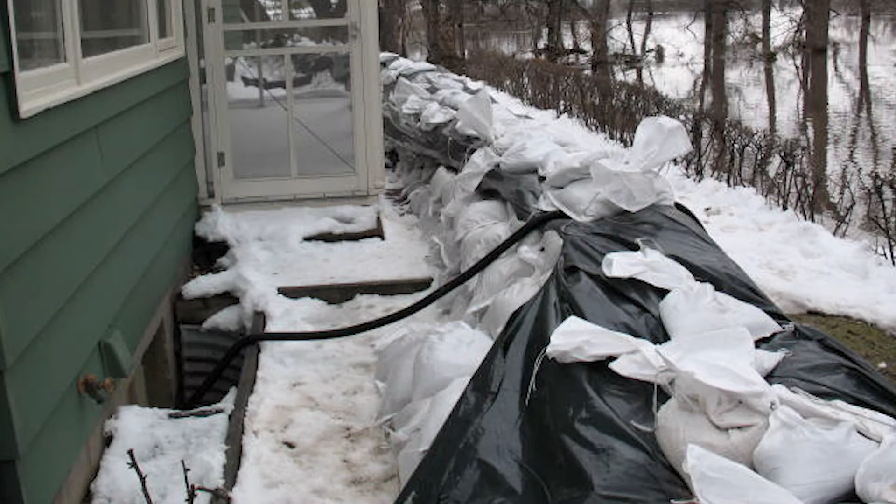So my life has really been impacted by flooding. I've had numerous family members that have lost their homes, and I've seen the devastation that happened in '97 and 2009. And we've all come to the realization that we need to have this project and we need to keep it moving forward.

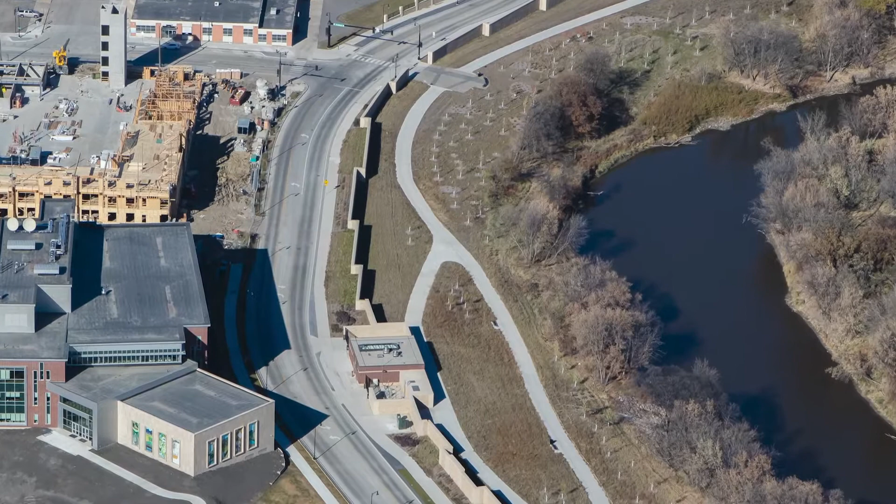I'm happy to show during this tour today all of the great work that's been done to date. And right now I'm walking along part of the levee here in Fargo and this beautiful flood wall that was implemented. Before this project was put into place, we used to have a 20-foot earth and clay levee here protecting all of downtown Fargo over here to my left.

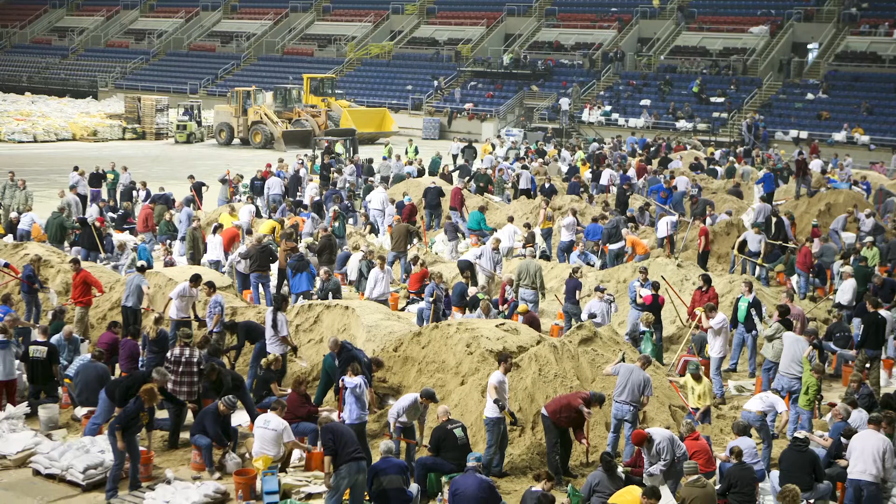And after 2009, it was just evident that we cannot continue to rely on these temporary measures. I was personally involved in a number of levee monitoring during 2009. Part of the stretch that I was looking after actually had a breach. Fortunately, we were able to fix it and shore it up. But it was a massive amount of work, and that story can be told numerous times across the city of Fargo during 2009.

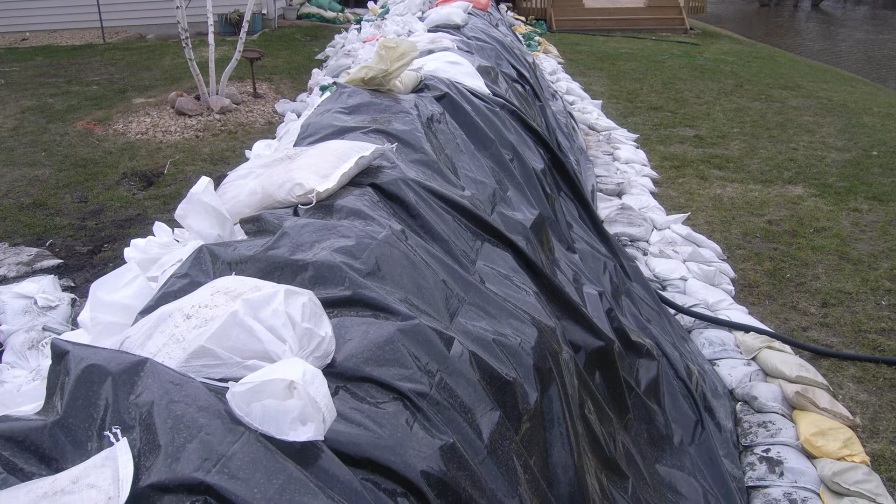As you all know, we were successful in our ability to fight that flood. But as scientists, we also know that the ability to have a much higher flood than what we experienced in 2009 is a very real possibility. And so we continue to move forward with this project and effort to provide substantial flood protection for the city of Fargo, the city of West Fargo, Moorhead, Horace, Harwood, and rural Cass County residents.

So I was a member of the diversion board in 2016 through 2018, and upon assuming the responsibilities of the executive director, I've really come to rely on a lot of the expert engineers and scientists that have been working on this project. And today our first guest that we're going to talk to is Nathan Boerboom. And here he comes right now.

Hi Nathan, how are you? Joe. Not too bad, how about yourself?

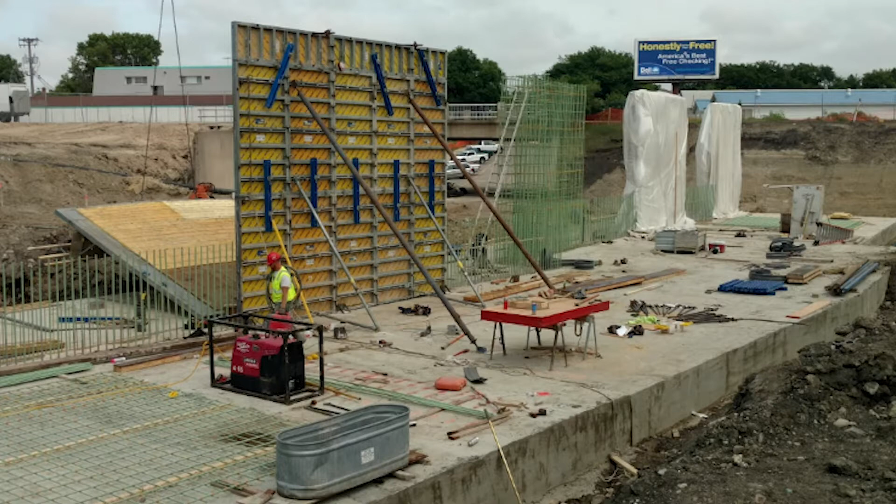Good. So Nathan is an engineer at the city of Fargo. I'll have him talk a little bit about himself, but he's been involved in this project since the beginning. Yeah, I'm Nathan Boerboom with the City of Fargo, Division Engineer. I've been heavily involved in all the in-town flood projects that have been going on for over 10 years now. Since 2009, we've built over 22 miles of levees and floodwalls.

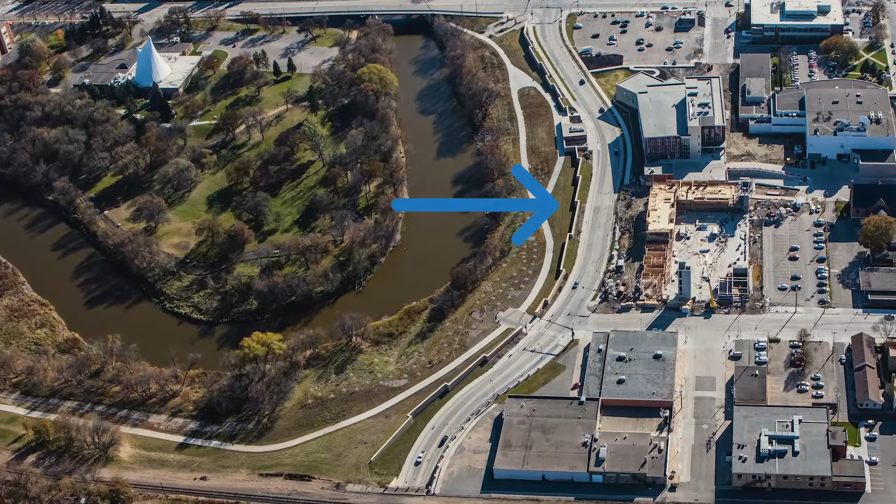We're standing here in front of the 2nd Street North floodwall. This was built in 2016 and 17. This one was built by the Diversion Authority. It is all the way from NP Avenue up to about 5th Avenue, the 5th Avenue underpass. This floodwall has actually seen water in 2019, so we did get to test out components of it in 2019. This floodwall is a critical component of all the in-town works that have been completed since 2009.

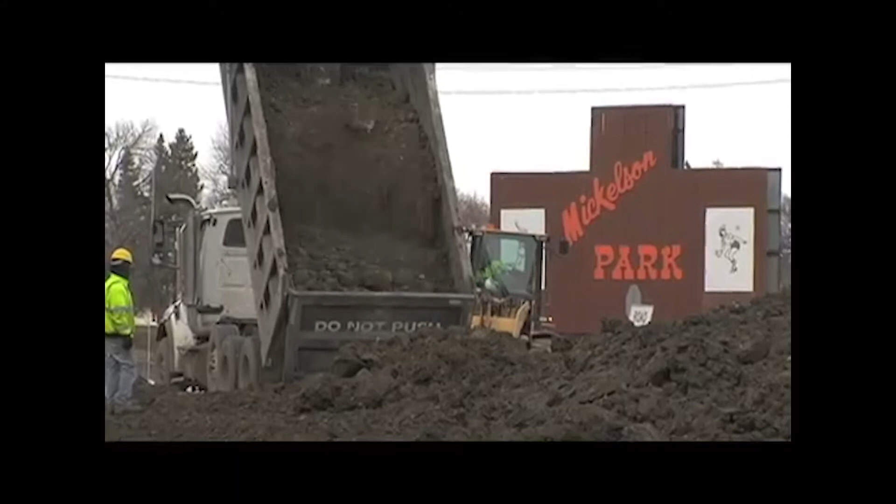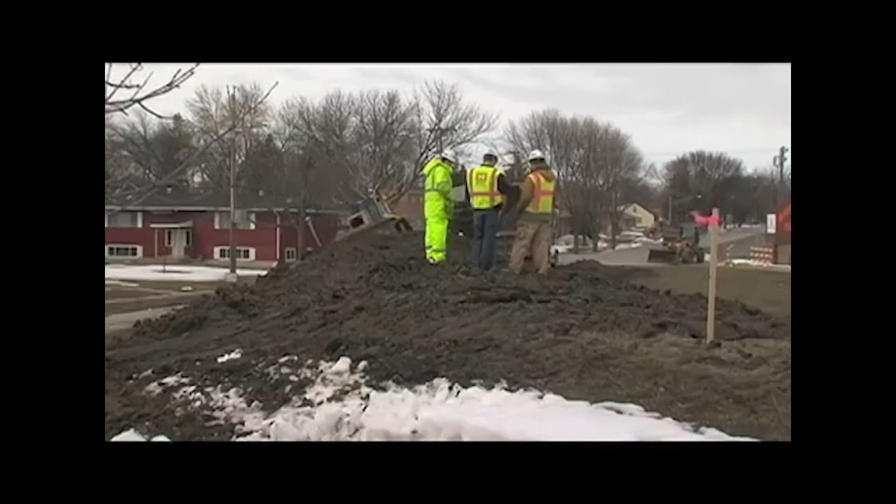2009, '97, all the historical floods except for 2019, we actually had to build a temporary levee out on 2nd Street here. That was quite an effort every spring to have to do. We couldn't start building that levee until the river actually got to about a stage of 24 feet, and we had water on the street at 30 feet. So it was very critical to time that construction just appropriately, and it took probably about 2,500 trucks to bring that clay where this floodwall now sits.

So it was a large effort, and when you think of all the emergency levees that we had to construct, this was our most difficult to construct and held back most of the water. Luckily, it was successful, and now we have this permanent floodwall we can rely on in the future.

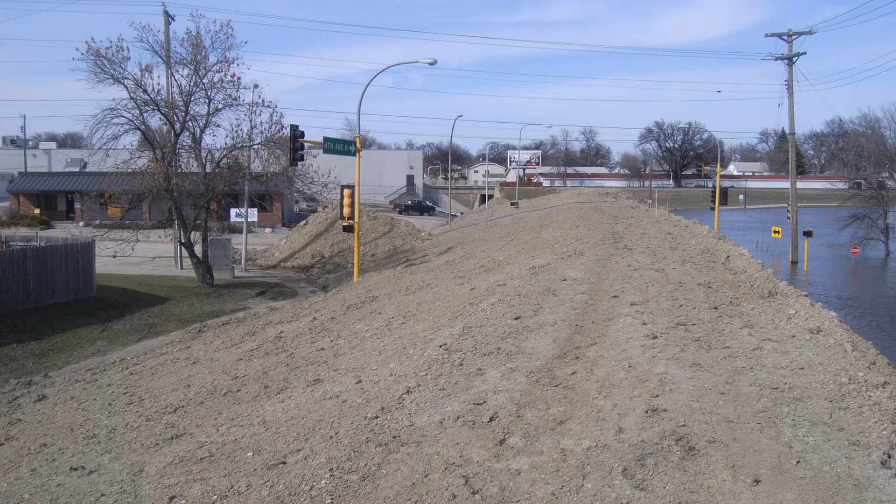Well, this looks great, Nathan. So there's obviously been a lot of work done already. Can you explain to the legislators how much work is left to be done? Sure. So like I said, we've built over 22 miles of levees right now. We still have about, I think it's 4 or 5 miles still to construct here in town.

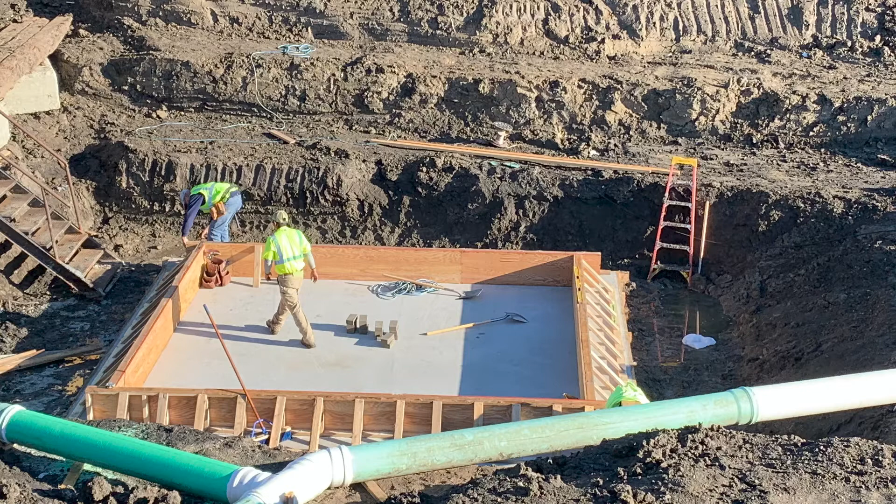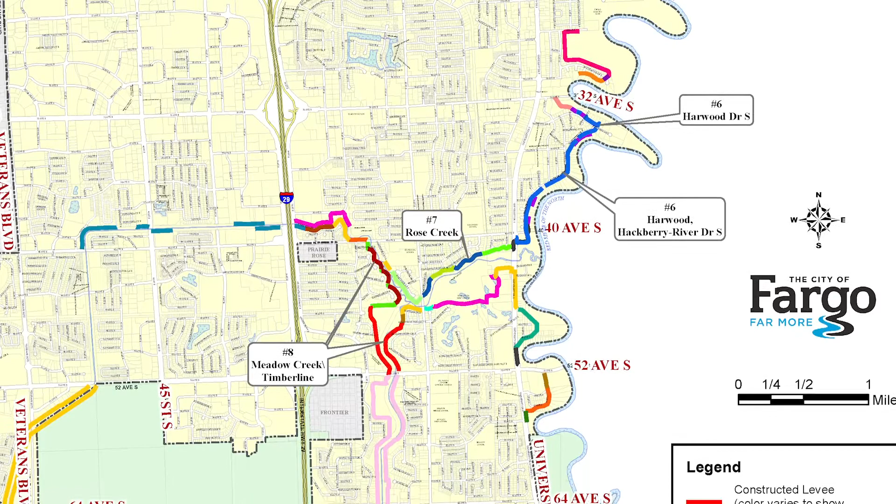With the change of Plan B going from 35 feet to 37 feet, that required additional in-town levees to be constructed beyond what was originally planned under the original diversion project. So right now, those are the projects we're concentrating on. There's 5 neighborhoods that we're specifically working on right now. We hope to construct 3 of those next summer, and then the following 2 in 2022. So we're getting close to wrapping up the in-town works, and hopefully we will be able to do so soon.

So it's interesting. So these projects here are actually part of the diversion project. Is that right? I mean, they all kind of work in concert with each other. And so we need to complete this work as well as the channel and the southern embankment and all of those other associated structures. Is that correct?

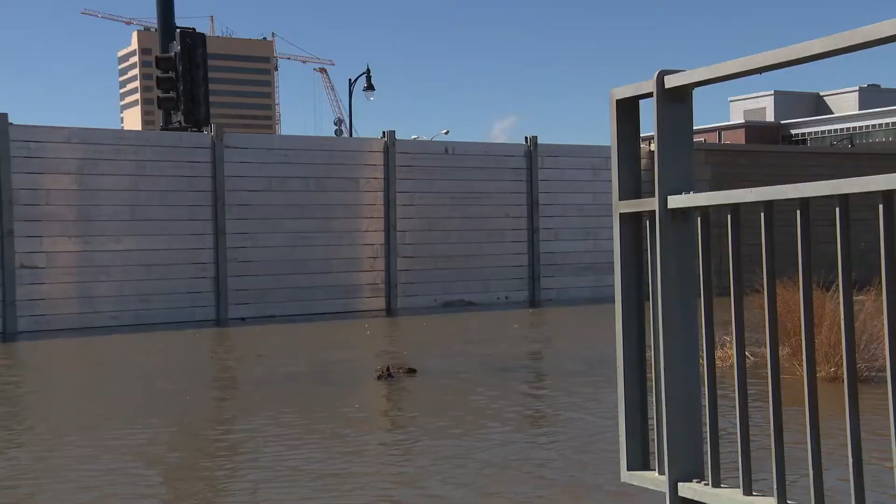Yeah, absolutely. The diversion project will not operate at a flood below 37 feet. So at 37 feet, you're still going to have quite a bit of water up against this flood wall here that we're standing next to right now, as well as a lot of other levees through town. And then even as the diversion continues to operate, we're going to continue to have to rely on all these levees and flood walls to safely pass those floodwaters through town. So without these levees, it would not be a complete project.

And I just mentioned previously that statistically we know that there's a chance of a much greater flood event than what we experienced in 2009, which is the flood of record. What is this infrastructure built to? I mean, can we handle a 500-year flood or greater?

So without the diversion, no. We would still have to build emergency levees even on an event less than the 100-year flood without the diversion. So if we had a flood similar to 2009, Fargo would still have to be building about 20 miles worth of emergency levees. So even though we've completed over 22 miles, we still would have a large emergency effort on our hands if we experience that 2009 flood again.

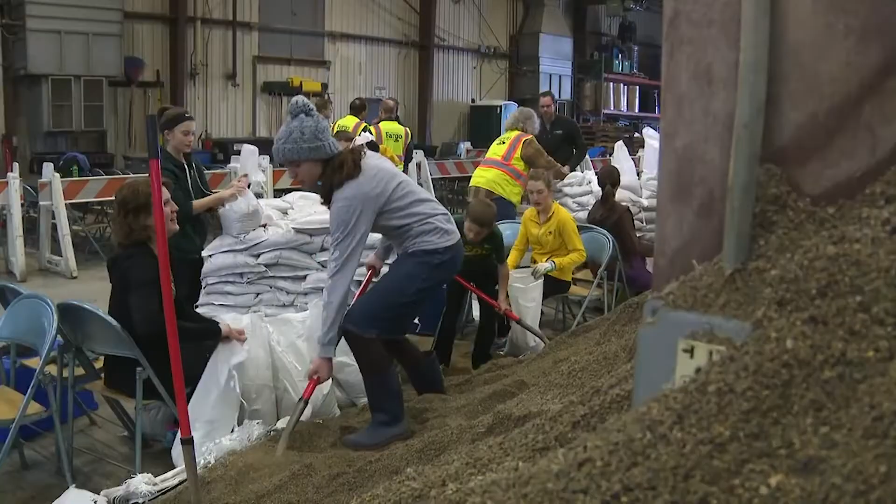However, once the diversion is completed, on the 100-year event with the additional in-town works I just mentioned, we will not have to complete any emergency measures. On the 500-year event, though, we still would have to. But at that level, we feel it's a much more manageable event that the city is willing to take on, once the diversion is completed.

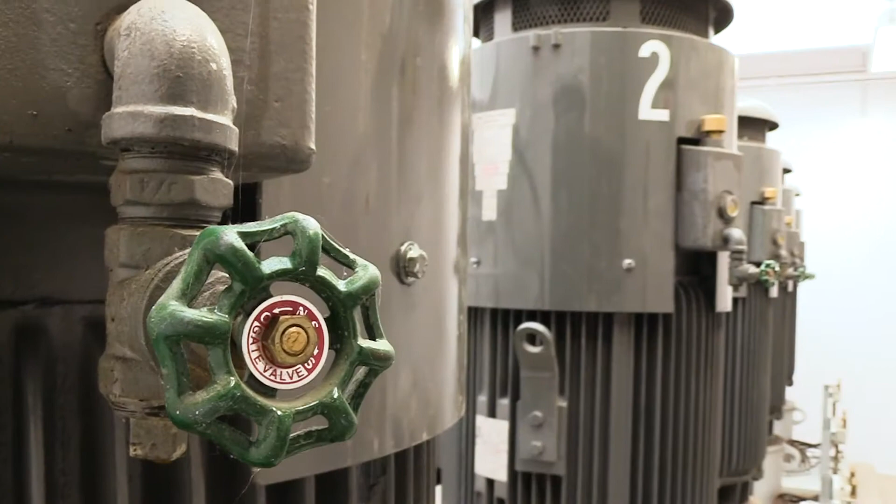Sure. So we're standing in front of a pump station. Is that right? Correct. Yep. So this is a pump station that serves basically all of downtown Fargo here. It has 5 pumps in it that are 15,000 gallons per minute each. So it's a rather large pump station. It will handle a lot of water and move it.

And these pump stations are necessary any time the river is high. We can no longer gravity flow any storm, rainfall or snow melt into the river. We have to physically pump all that water into the river. So that's a critical component of the flood infrastructure, not just the levees and flood walls, but also all the pump stations we have throughout town. And right now, the city of Fargo has 75 of these throughout the city.

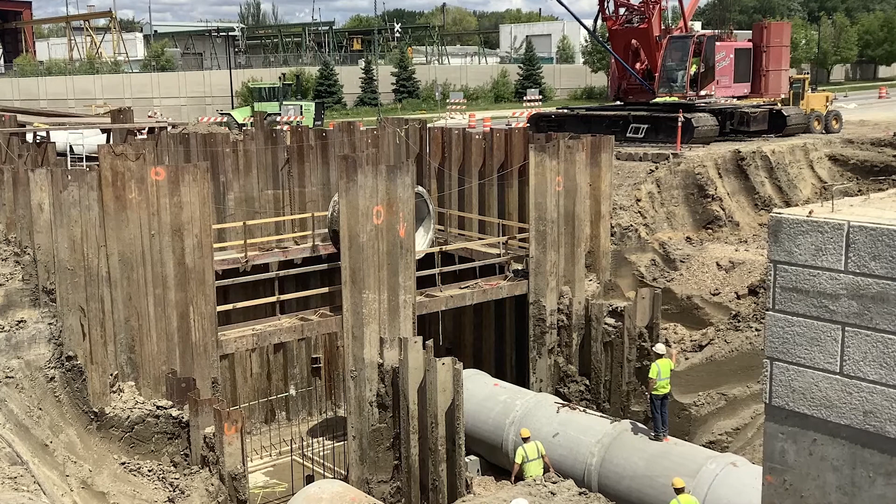So 75 pump stations, are a lot of those related to Red River flooding, and are those going to be part of the diversion project as well? Yes, all these 75 pump stations are critical as well, just like the levees and flood walls, to safely pass those floodwaters through town. The majority of them are located on the Red River, but we also have legal drains coming through the city. So Drain 27 or Drain 53 are a couple of them on the south side of the city. Those have lift stations or pump stations along those as well to pump all that runoff into the drains.

Yeah, that's interesting. And so I understand that we have a lot of flood risk from those drains as well, right? So if there were no diversion, we're talking about many miles of potential levees to try to give us some level of flood protection along those drains. Correct. As well. Yep, absolutely.

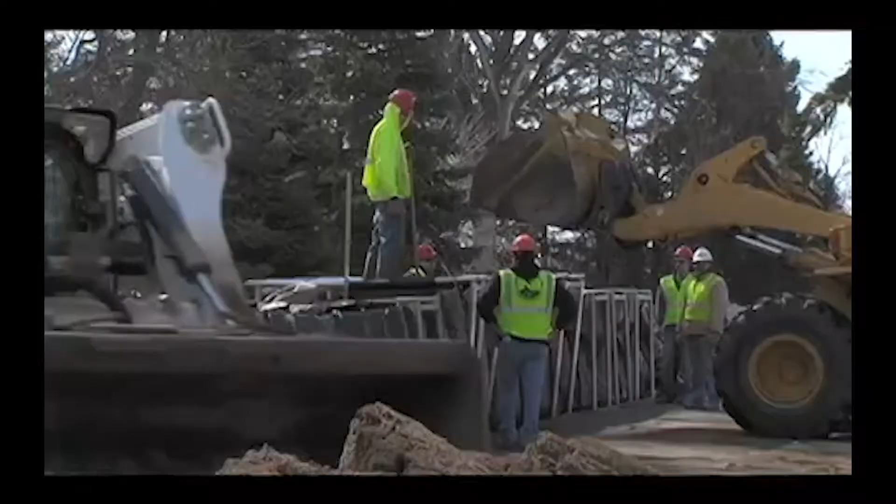So not only do we have to worry about the Red River, only one side, luckily, Fargo has to worry about. Moorhead has to deal with it on their own. But we also have to worry about 2 sides of these legal drains. And you're exactly right. There's miles of those legal drains coming through unprotected through the city that we have to either build temporary levees or try to build a permanent levee along there, which we have done in some areas but not completed. Yeah, and that's what I think a lot of people don't understand.

We're always focused on the Red River flooding, but we have the Sheyenne River, the Maple River, all of the tributaries that come in from the west also cause problems in rural Cass County. The city of West Fargo, to a certain extent, they do have their Sheyenne diversion, which the FM diversion is going to dovetail into. But it's a pretty major concern and definitely a benefit for the diversion project to be able to provide that comprehensive protection for everybody in the Red River Valley in this area.

Yeah, absolutely. This project is a metro-wide approach to solve Fargo, Moorhead, West Fargo, Harwood, Horace, everybody's flooding issues from all those rivers you mentioned.

There you go. So here is the actual electrical room. So this is where all the electrical components are that handle all the pumps and motors on the other side. You can also see here's the level in the wet well today. So right now it's about 7 feet of water sitting in there. Again, it's 30 feet down.

So if it was raining out today, you'd see that water level coming up, and when it reached a certain level, it would call for one of the pumps to turn on, and it just cycles through all these 5 pumps on its own. So that way we make sure that we get an equal amount of hours on all the pumps, and then if for some reason the water's coming in so fast that one pump won't keep up, it'll call for additional pumps to turn on until all 5 pumps are running. Wow, that's pretty impressive.

And so all of these new lift stations with these PLCs are all tied into a control center somewhere, right? So you can monitor remotely what's happening with the pump stations? Yep, correct. So part of that is the SCADA system. It remotely reports to a server that the City of Fargo has, and I can pull it up on my phone, and we can look to see if there's any issues with the lift stations, any alarms that may be going off, or which ones are running as well.

So it's a helpful tool for our public works when we've got 75 lift stations, that they can remotely monitor and see if there's any issues they have to go check out. Yeah, that certainly provides some advantages over what happened in 2009 when we probably had to manually check on these pump stations and have some redundant backup pumps and generators and everything else around. So it's nice to take advantage of technology that exists today.

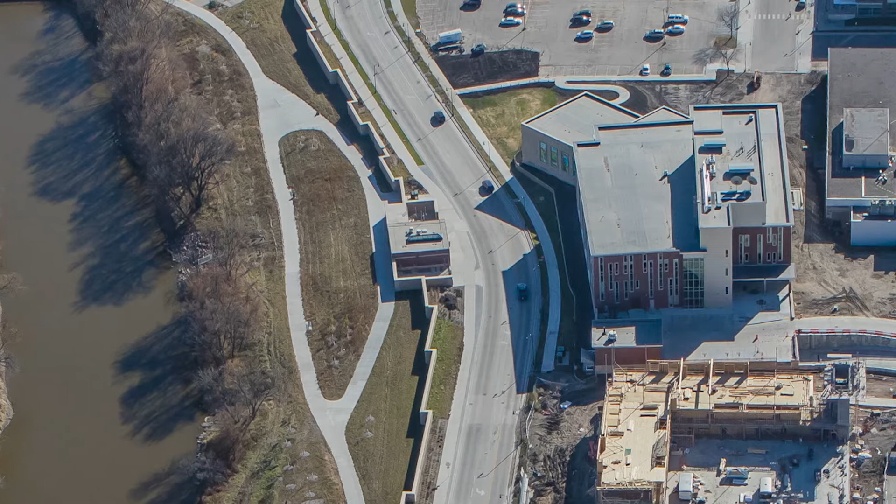For sure, that's excellent. All right, Nathan, why don't we move on to another spot? I'd love to explore more about where the City of Fargo's at with their... Absolutely, we can go check out one of those.

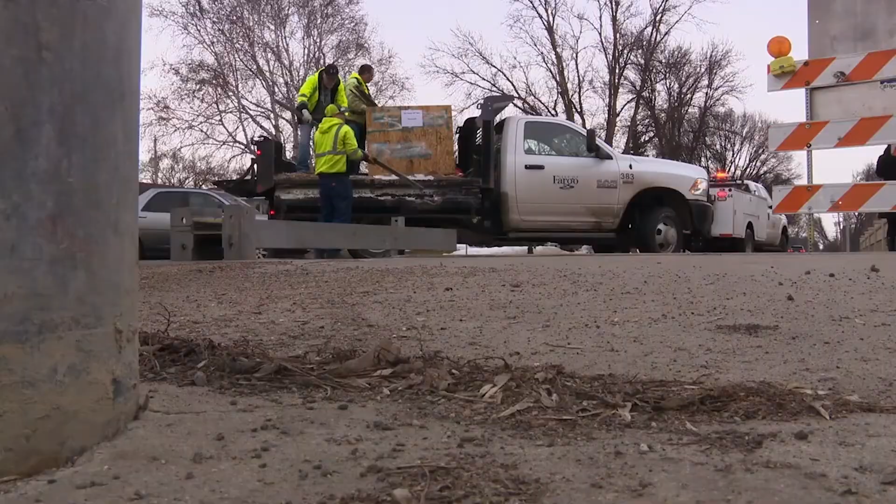So Nathan, this is the First Avenue North Bridge, and so this is the crossing. I notice a large opening here in our levee system. How do we manage to deal with this? Correct. So here there's removable aluminum planks that we install. About every 8 feet, there would be a column coming up along the First Avenue Bridge in this opening that our public works guys will come in and install when the water's rising, and they'll create that wall that we need to hold back those floodwaters.

So this one here is about 160 feet wide, so it's the longest one in town. If our public works guys bring about 10, 12 guys down here, they can get it installed in probably about 5-6 hours. So it doesn't take too long, but it's still something that we have to make sure we get in place at the perfect time.

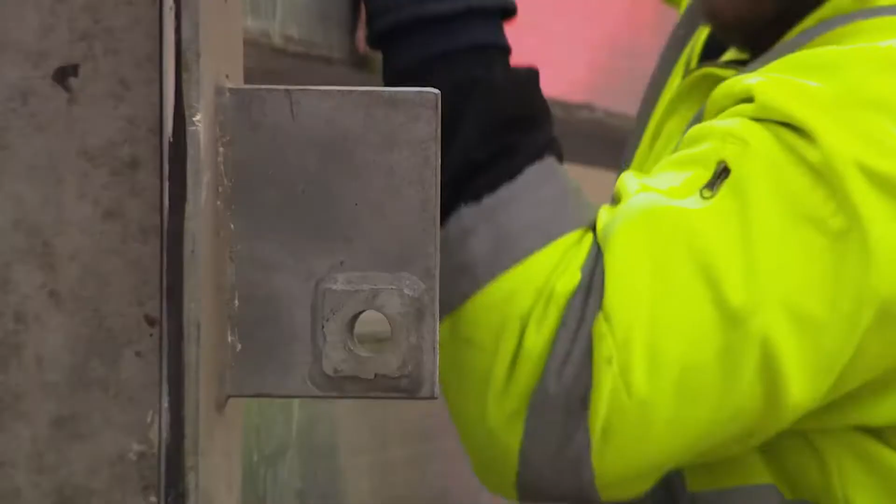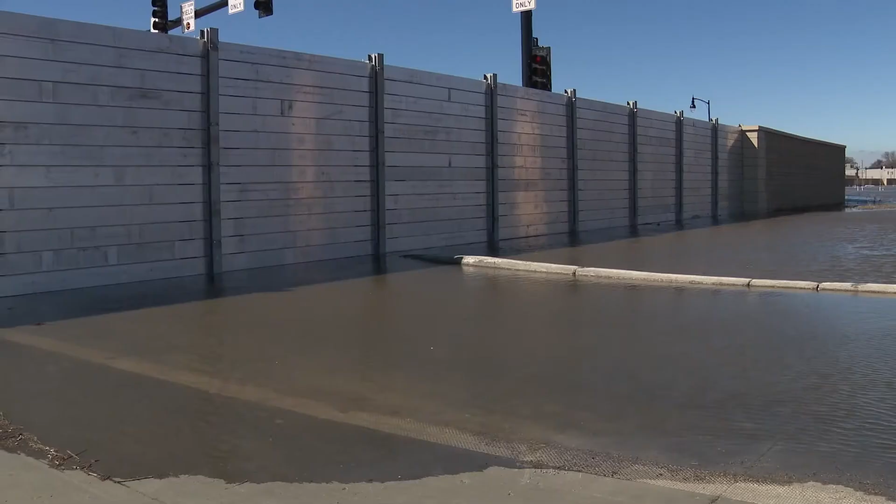Yeah. And I remember this bridge was closed in 2019? It had floodwater up against this temporary barrier here. Yep, correct. 2019 was the first time we got water up against this removable barrier, and it worked as expected. Yeah, I call it temporary. I guess it's removable because it is certifiable as far as 100-year protection. Correct. It's something that's utilized elsewhere in the state.

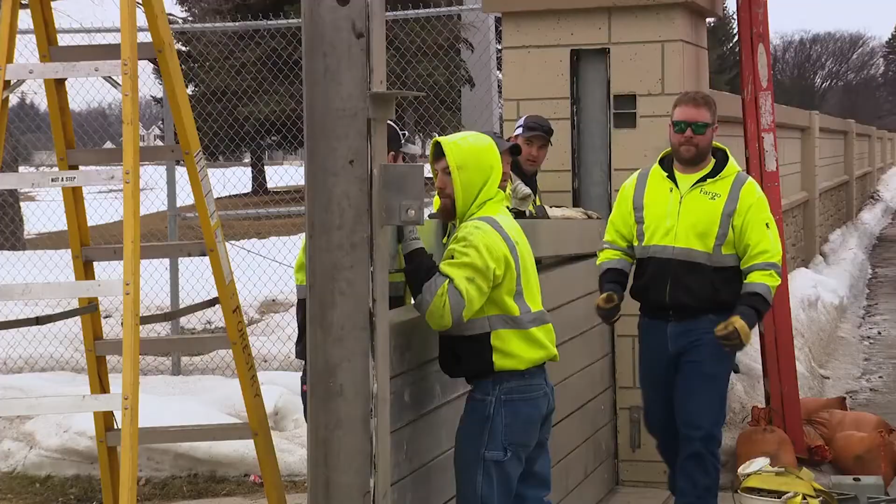Grand Forks has a handful of these as well, and Moorhead has them, and here in Fargo we have, I believe, 6 of these removable openings now throughout the city. So we try to limit them because obviously they're not as structural as a concrete wall is, but it's still something that we can rely on during a flood and allows us to maintain the transportation aspects that come through the city.

Yeah, I suppose it wouldn't have been feasible to reconstruct this bridge and raise the elevation so you go up and over. Correct. So this is a cost-effective, innovative solution here.

So when this is closed during, say, a 100-year flood event, do we still have a good transportation conduit between Moorhead and Fargo? So the Main Avenue bridge is elevated high enough where we do not have to do any temporary measures on it. So that allows us to keep that connectivity between Fargo and Moorhead. And then, of course, the interstate bridge is open as well. Sure. But that would be the only 2 bridges open during a 100-year flood versus the 6 that we have today.

Sure. And how many of these removable barriers do we have along the location? So we have, I believe, 6 here. We got a couple up by the El Zagal Golf Course, we got 2 here at 2nd Street North, and then we got 2 over at 2nd Street South as well. Excellent. All right, well, let's go down south and take a look at what we got going on down there. Sounds good.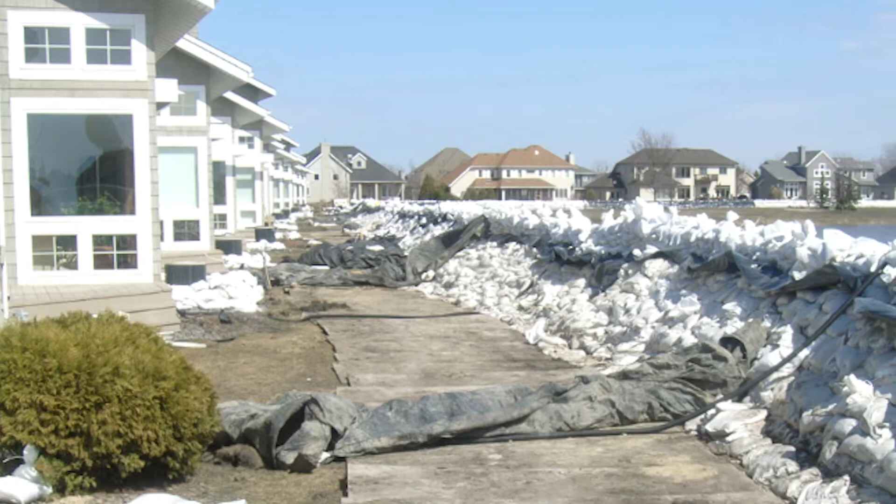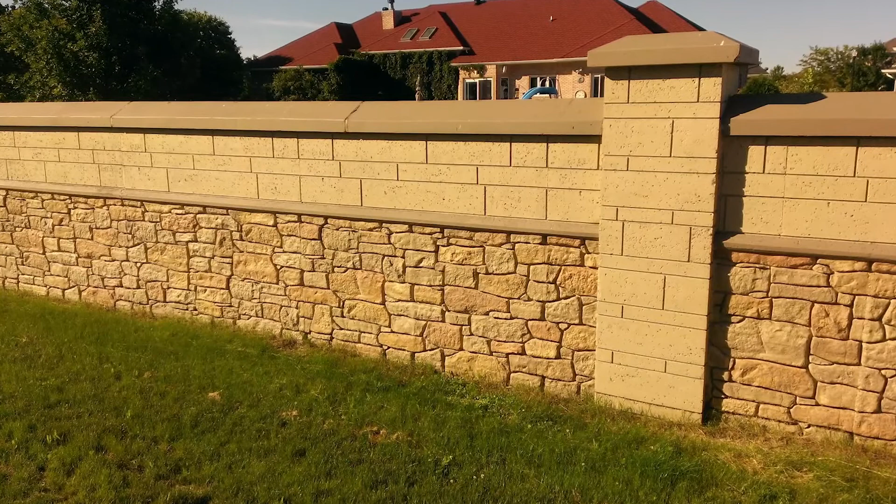I know this area was impacted in 97 and in 2009, and actually where we're standing right now, there was a home here not that long ago. Is that correct? Correct. Yep. So we're seeing a lot of levees and floodwalls, as we talked about, along both sides of the drain here. Obviously, these are also going to provide protection while the diversion project's in place as well. Right? Correct. So just like downtown, during a 37-foot flood, there will be water up against these levees and flood walls along here.

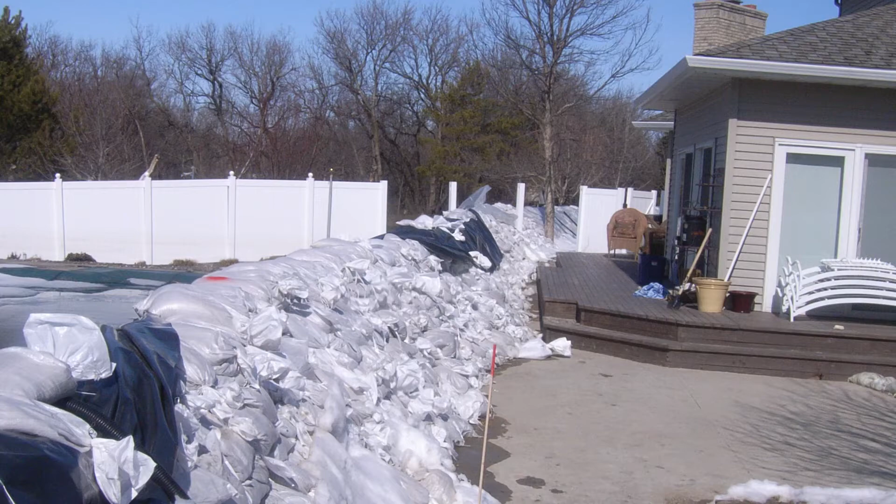So you're absolutely correct. Here we're standing where 3 homes used to exist. They were built probably in the late 80s, so they went through the 97 and 2009 floods. We had the sandbags behind them. After the 2009 flood, these 3 homes, as well as I think we're up to 255 homes right now that we've purchased and removed throughout the city, were removed and allowed us to build the levees.

So when we go through the project development, we try to maintain the houses as much as possible. Obviously we don't want to remove houses unnecessarily. They're our tax base as well. But unfortunately, there are quite a few homes, like I mentioned, over 250 of them, that we did have to acquire and remove in order to allow us to build levees or flood walls through here.

There are some areas throughout town where we have been able to build levees and flood walls behind existing homes and not have to acquire them. The stability of the riverbanks or the drain channel allowed it. There we had to acquire private easements or permanent levee easements behind these homes on their private property. I think right now we're up to 90 or almost 100 of those that we had to acquire. So not only have we impacted 250 plus homes to remove, but we have also impacted over 100 people's lives by building a levee or flood wall in their backyards.

So yeah, I think that's a good point, Nathan. When you look at this area right here, you can see some of these levees are pushed back quite a ways, obviously where the homes were removed, and that does increase some flood retention area, also bank stability, of course. But then you can see areas where we could save homes, and there's flood walls in order to keep those in place. Yep. And so it's kind of a balancing act. We're obviously impacting folks and trying to figure out ways that we can put the least impact on neighborhoods and people.

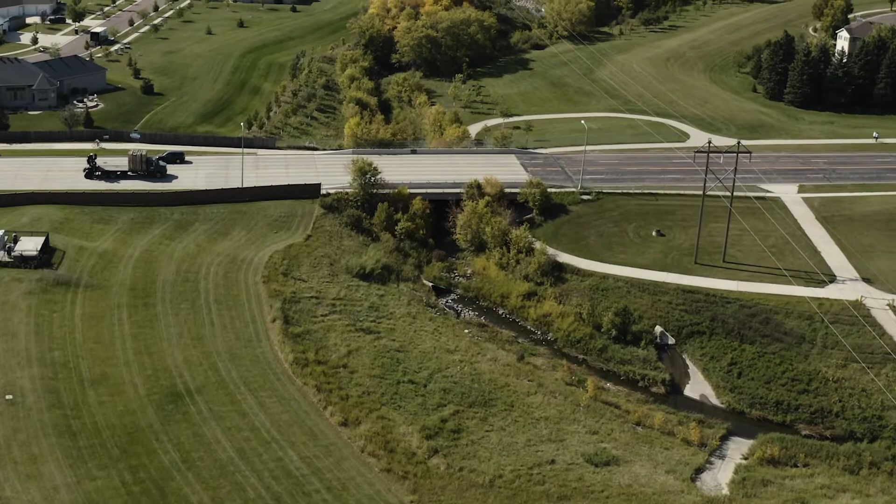And then on the northwest corner here is an area where we acquired 18 homes up there, removed all those, and built a levee through there. So those are really the 3 options that we use. And then a key component, though, of building levees anywhere throughout the city is also the Park District.

So the Fargo Park District is a separate entity from the city of Fargo. They're their own governing body, but they are a very willing partner for the city to be able to impact a lot of their properties. And here on the Rose Creek Golf Course, we shut this golf course down for a whole summer to allow us to be able to build a levee across the golf course. Which in return helped us not have to acquire so many homes, but also got that line of protection that we needed there.

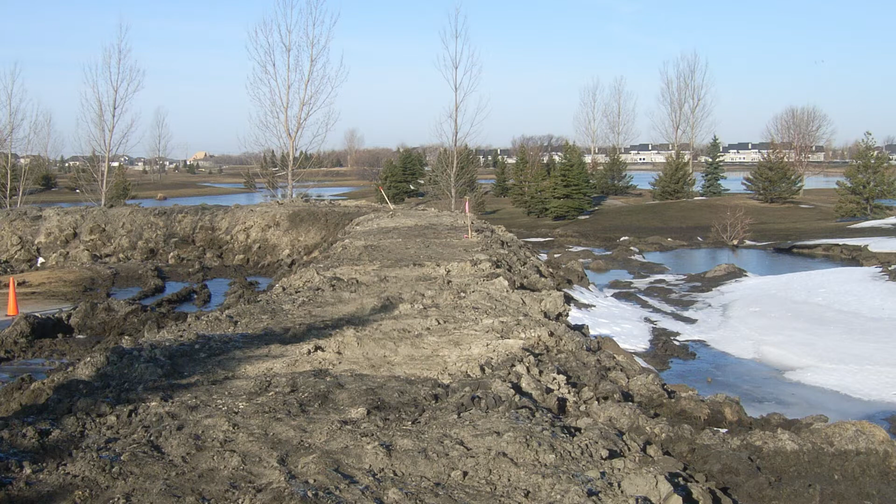And for example, in 2009, during the spring flood here, we were running out of time to be able to build a levee or sandbag levee behind all these homes. So there's a component here where we just physically put a couple excavators out in the golf course, start digging right on site, destroying their golf course, and throwing that dirt up on site and constructing a levee right there. So we didn't truck any dirt in, we destroyed their golf course for a whole summer there as well to be able to protect the city during the 2009 flood. And that's just one example.

There's countless areas throughout the park district, whether it's Mickelson Field, where we eliminated 3 softball fields, and they allowed us to build a levee on those. So without the park district, we wouldn't have been as successful as we have been to date with building levees. Yeah, that's a good point, Nathan. And I remember during the 2009 event, the night it actually crested, the forecast was for a 45-foot crest, which would have been much higher than what our temporary protection was built for.

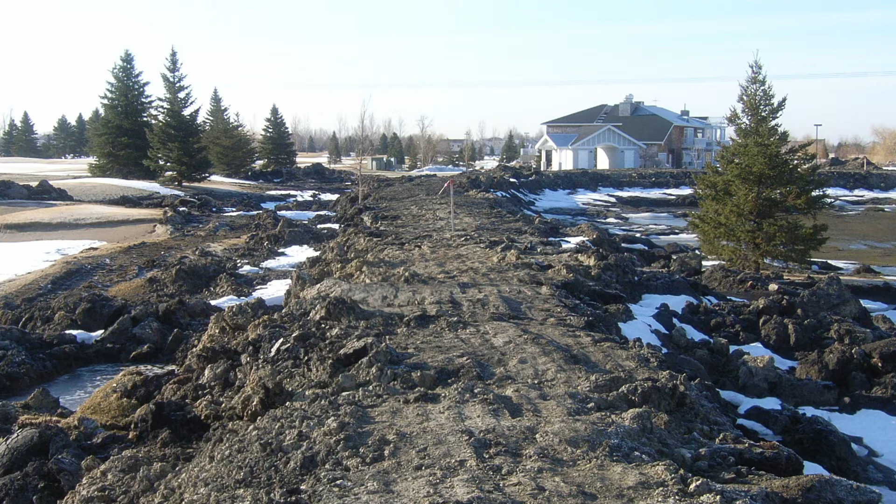Yeah, absolutely. Luckily, in 2009, the crest was just short of 41 feet, but the earthen levees that we're building throughout town are right around that 43.5 to 44 foot mark, and our sandbag levees in 2009 were all built to 43 feet. So, basically the same height as our levees.

And you go and extend those levees through some of these existing homes, and you just try to picture again what 2009 looked like with 6 to 7 foot tall sandbag levees behind these homes, and just the effort to go place those 6 million plus sandbags that we had to place, and place all those volunteers right next to those cold rising floodwaters. There's a lot of safety concerns with trying to continue to use sandbags as our line of protection.

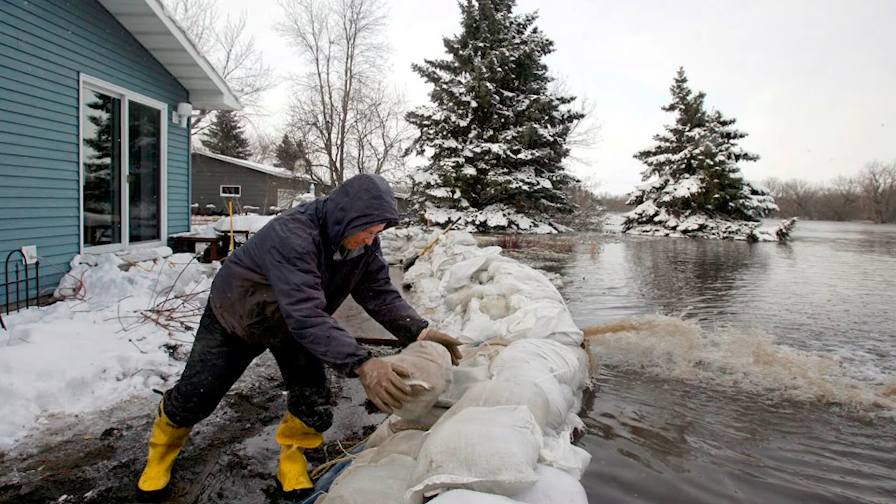Yeah, absolutely. Well, Nathan, I thank you for all the hard work that you've done for the city of Fargo and now for the Diversion Authority as well. I know it can be very difficult working with homeowners that need to relocate and move out of their homes and do the buyouts. And Fargo's done a number of those. But you have not had to use any quick take actions and only a minimal amount of court action on those properties. Is that correct?

That's correct. So of those 255 homes we've purchased, we've only gone to eminent domain twice. So we tried to be more than accommodating to property owners, but also respect the taxpayer dollar as well. So we negotiate very well. Our team does a pretty good job and has been successful on acquiring a strong majority of the homes without having to take any court action.

Yeah, absolutely. That's kind of a balancing act again right there, making sure that we're using taxpayer dollars the right way, and also being very respectful and empathetic for the situation that we're asking some folks to be in.

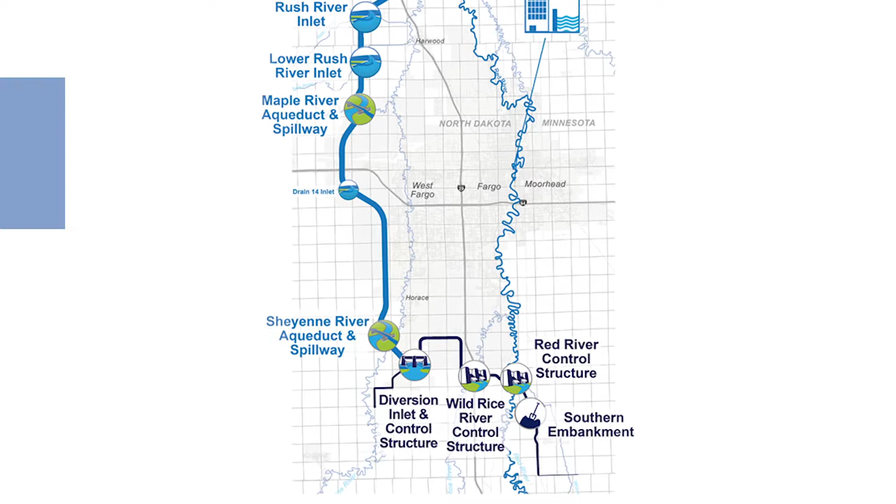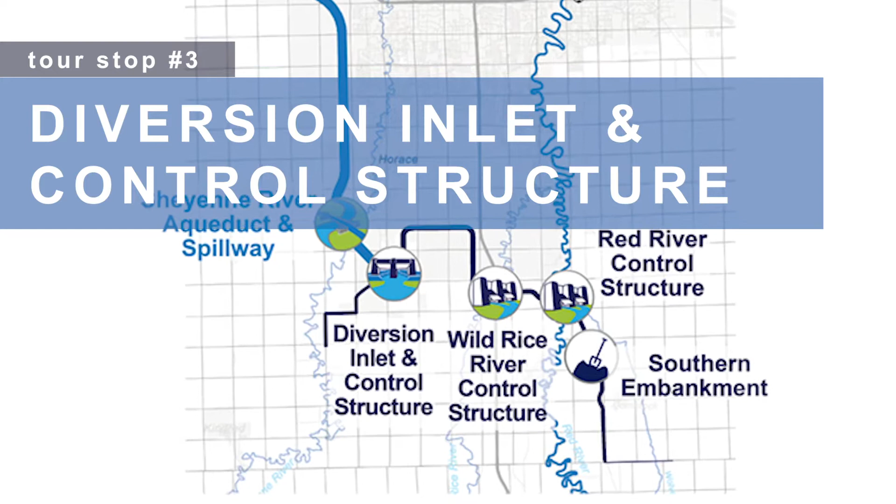Here with Dwayne. We're at the inlet and control site for the diversion channel, and I'm going to be asking Dwayne some questions about the progress of the Corps' work and where we're at today.

So, hi there, Dwayne. Nice to meet you. Good to see you again, Joel. Yes. Dwayne Perkins, structural engineer with the Army Corps of Engineers in St. Paul. Great. Let's go take a look.

So tell me a little bit about the project site and where we're at with construction this year. So the project site, as you know, is a couple miles south of Horace.

This will be the linchpin for the system that basically allows water to get into the diversion channel from the pool. Where we're at with construction is we're actually placing the foundation segments for what will be the structure itself, the gated control structure, and starting to build some of the walls that will tie into the rest of the southern embankment for the rest of the project.

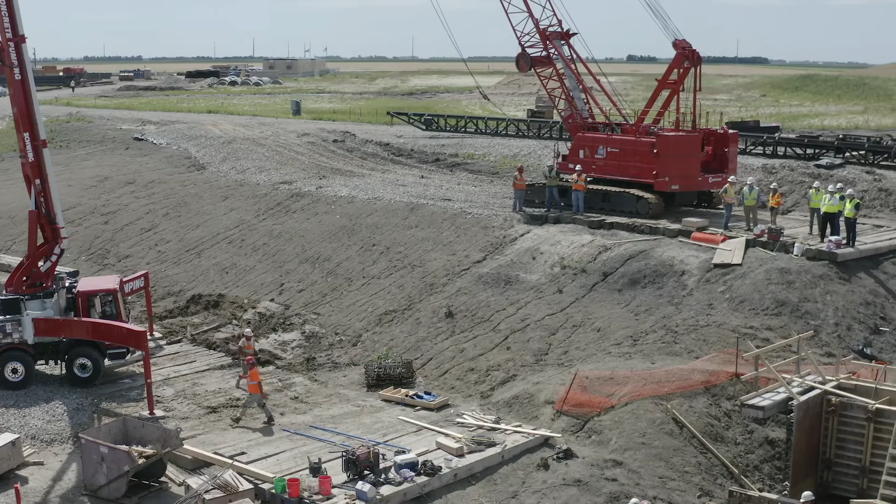Yeah, I can start to see some things coming out of the ground now. I know there's been a big hole out here for a number of years, and it's kind of encouraging to see some of the structure elements being constructed now. So when did this project start? This project was awarded in December of 2016.

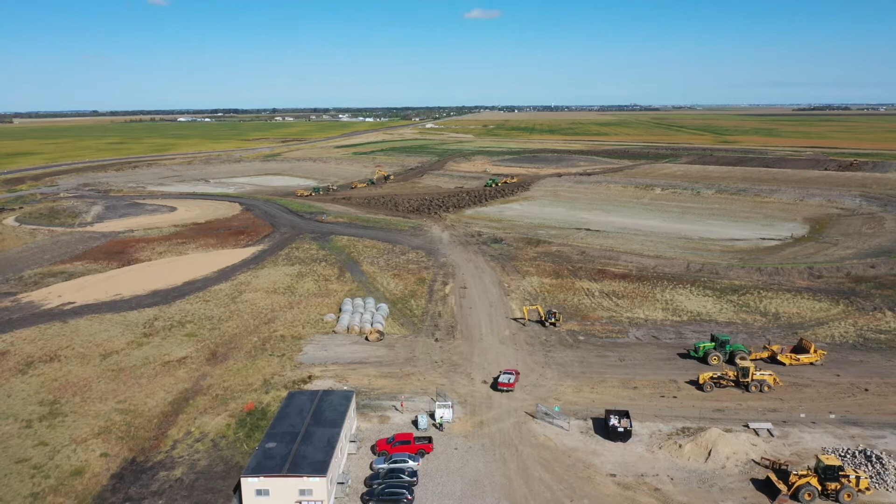Got going that next summer, kind of excavating the hole, and then with the legal injunction shut down for a little while. But last summer really got going, driving piling for the structure, and this summer started placing the concrete. So you can actually, like you said, start seeing the concrete structure come out of the ground. Oh, excellent. So you talk about piles.

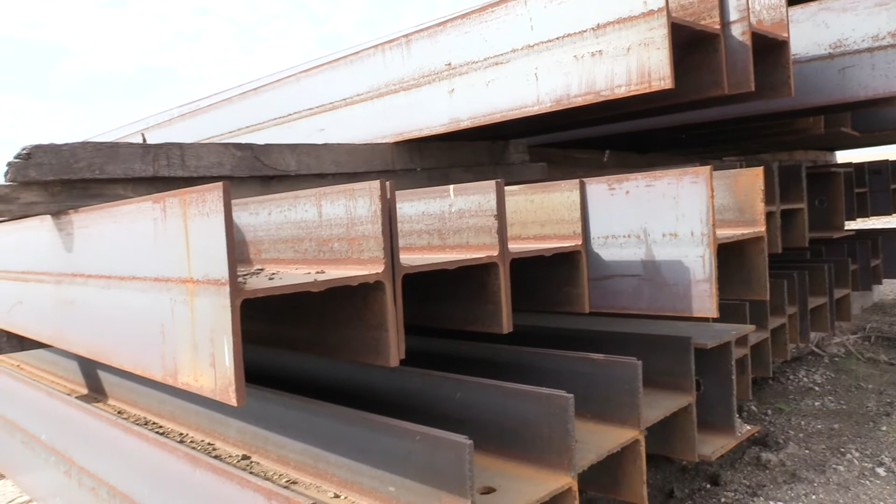Those are steel I-beams that are driven down into the ground. How deep do those go? So the steel I-beams basically support the structure. The soil up here is great for farming, but not great for building structures on. So we drive them into the ground about 70 or 80 feet down into the glacial till, a hard layer of soil down there, and that will support the structure from moving. Now, how many of those piles are located at this site? Oh, there's miles and miles of pile.

And Ames Construction is our contractor out here? Yep, you're correct. Ames Construction out of Burnsville, Minnesota is taking care of the construction for the diversion inlet structure. And they're also the contractor for the Wild Rice control structure. Yep, absolutely right. And that's being constructed a few miles away from here. And I understand that project's going along very well.

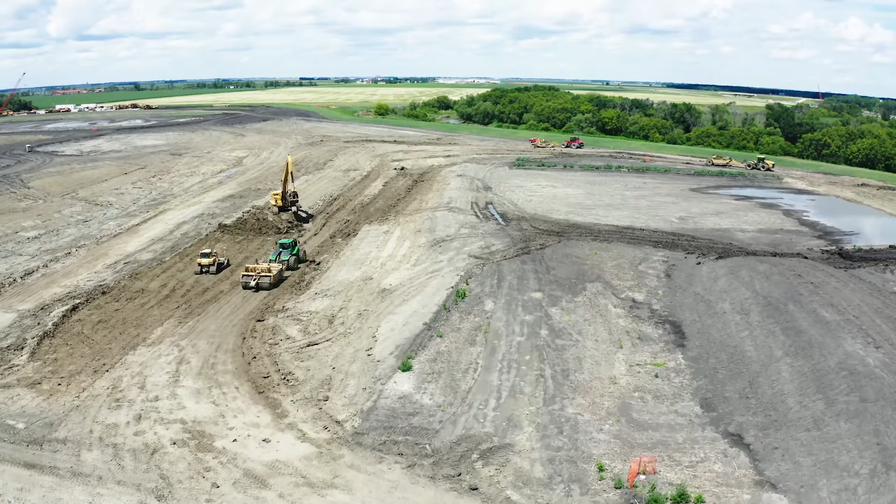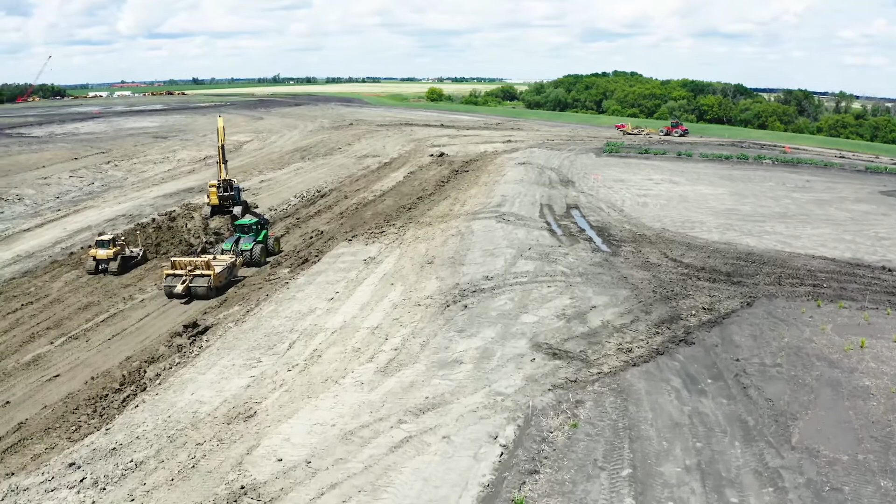Yep, right now they're driving piling for the Wild Rice infrastructure. So it'll be pretty cool to have two structures a couple miles apart, pretty close together in terms of schedule. You can almost look into the future for the Wild Rice at what they're building at the diversion inlet structure. So are the crews working between the two sites, or does Ames have specific crews for each project? I think Ames has specific crews for each project. Their pile driving crew has been going back and forth, but I think the carpenters are unique to each site.

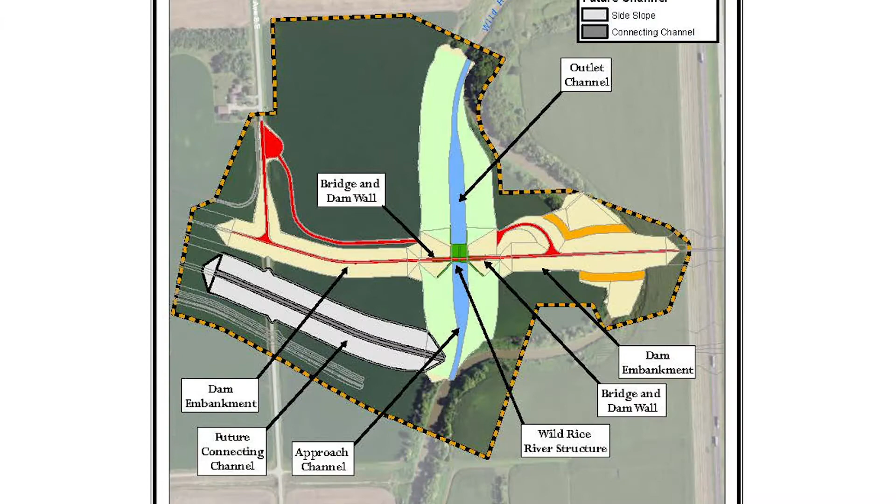Sure. And the Wild Rice control structure is unique because you're building that on a peninsula, basically, and you're going to be rerouting the Wild Rice River through that structure when it's complete. Yep, you're absolutely right. Basically just a little peninsula of land. We're building it off the side, and when it's all done, we're going to reroute the Wild Rice River right through the structure. Very similar to the Red River structure down the road. So I was out there a couple weeks ago, and I couldn't believe how big the hole was.

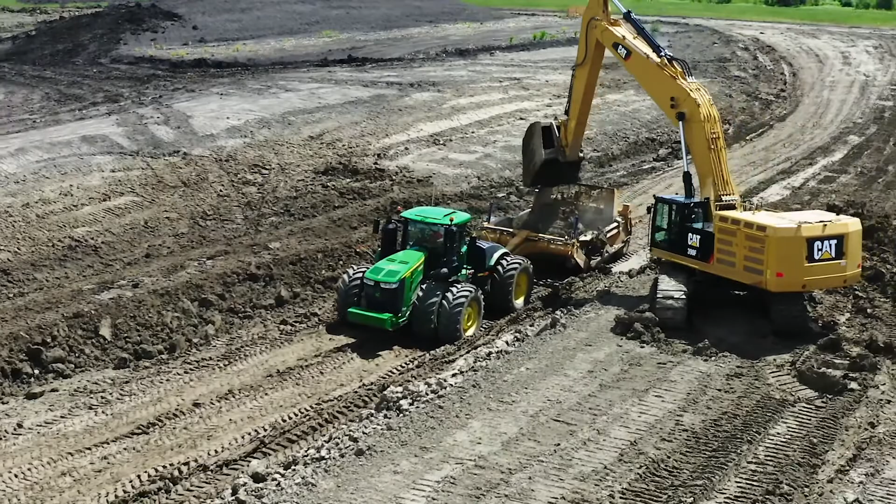To get down to the river bottom, it is pretty amazing. We'll show the legislators some photos and video so that they can see the magnitude of that, very deep excavations that are occurring there. Yeah, absolutely. So we just had a big pour out here a few weeks ago, and we're planning another one this weekend, I understand.

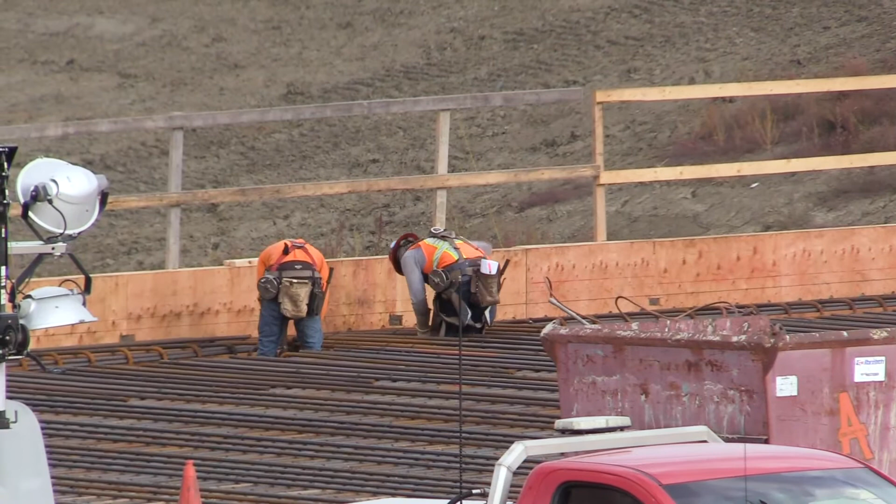Yep, so as you can see down there, the crews are finishing up the reinforcement layout for the control structure. That'll get placed Saturday morning, starting bright and early. That'll be about 1,100 cubic yards of concrete, about 6 or 7 feet thick. That'll actually support the bridge and the steel gates, which control the amount of flow going into the channel. So that one's obviously pretty critical to the entire structure. So 1,100 cubic yards? Yep.

So you guys were out here a couple weeks ago with Senator Hoeven, and that one was about 550 cubic yards. Wow. Next one's about 1,100 yards, and that is 2A. The twin on the other side will basically be the same one. So there'll be two big placements coming up, one this Saturday and then one in the future.

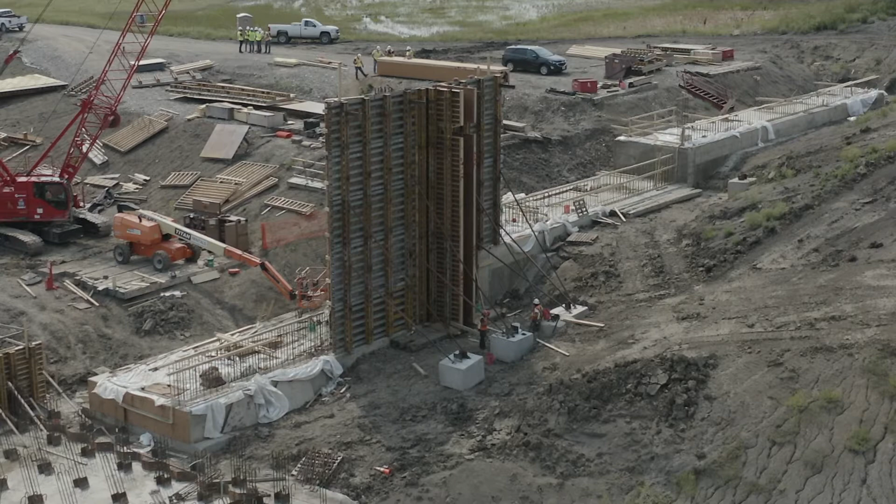Wow. So they'll basically pour concrete all day long on Saturday in order to do that 11. So what's a typical cement truck hold for yardage? Around 10 cubic yards of concrete. 10. Wow. So we're talking about 110 trucks they'll need throughout the day. Sure. And all that material is being supplied by local vendors right here in Fargo? You are correct. The concrete is being produced by Aggregate Industries, right up by 12th Avenue, up there.

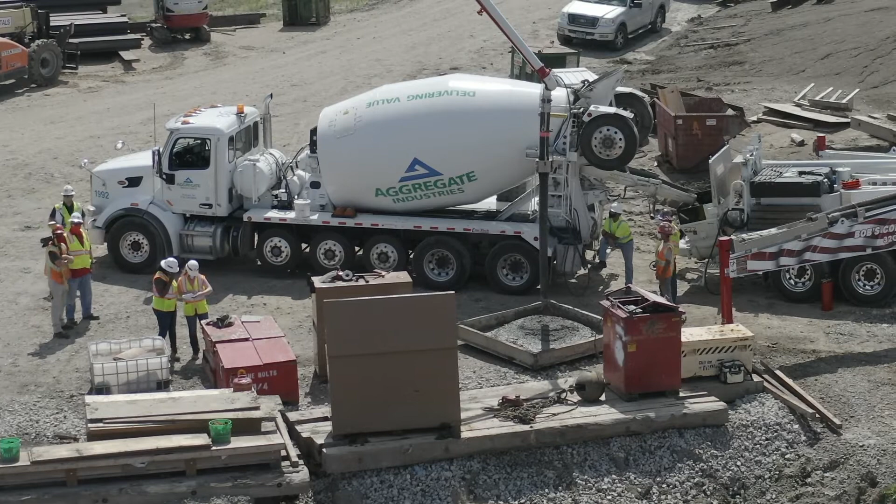Sure. Yeah, that's one thing that we talk about quite a bit, just the magnitude of materials and workforce necessary to complete this project. And we're just seeing some of the initial impacts, positive impacts as far as that's concerned. We do hope to let the diversion channel and start construction on that next year. And that's going to dovetail into this project, in fact.

Yep, you're absolutely correct. Where the diversion inlet structure will end is where the channel will connect. So we're kind of at almost the start of the channel. So it's kind of cool to be able to see into the future a little bit. Yeah, definitely. And the Corps will kind of coordinate with the private developer that we hire for the channel as far as how these elements all kind of come together right here.

So excellent. I see some vertical piers. Is that where the gates are going to be located? So what you see here to the left, covered up in the white plastic, that's basically the dam wall. Okay. Basically just a concrete wall, and that will extend all the way out to the dirt pile there on the left. So you can imagine the soil will come up to there, and the concrete wall will come out and basically meet up with another concrete wall, and that's where the gates and the rest of the structure will start. Got it. It's kind of from the right of that plastic to the right all the way across.

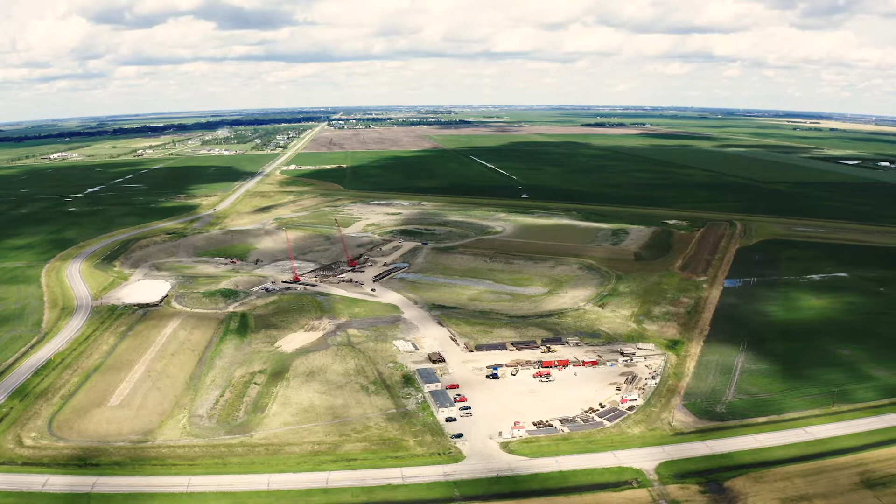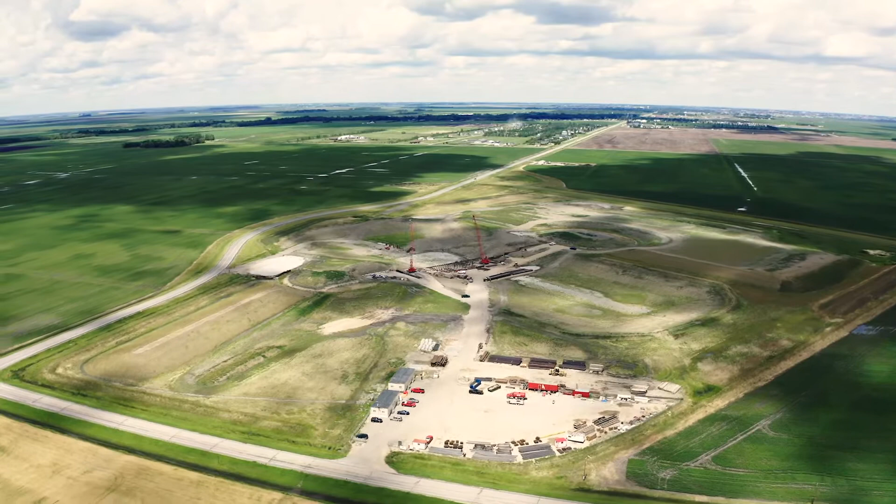So on top of the plastic there, you can kind of see it looks like a bridge pier almost. So our bridge deck will actually sit on top of that. So in the future, you can envision a semi truck, a pickup truck driving across the top of the bridge, basically to get all the way across the structure. Wow.

So when you look at the soil on either side of the inlet here, is that about how high the embankment's going to be coming in and leaving this location? Yep, you're exactly right there. The soil on both sides is basically where the concrete structure will end. So that pile on the left and then the pile on the right, that's where the concrete structure will end. But you're right, the top of the soil there is about the same elevation the top of the embankment will be when it's all said and done in a couple of years.

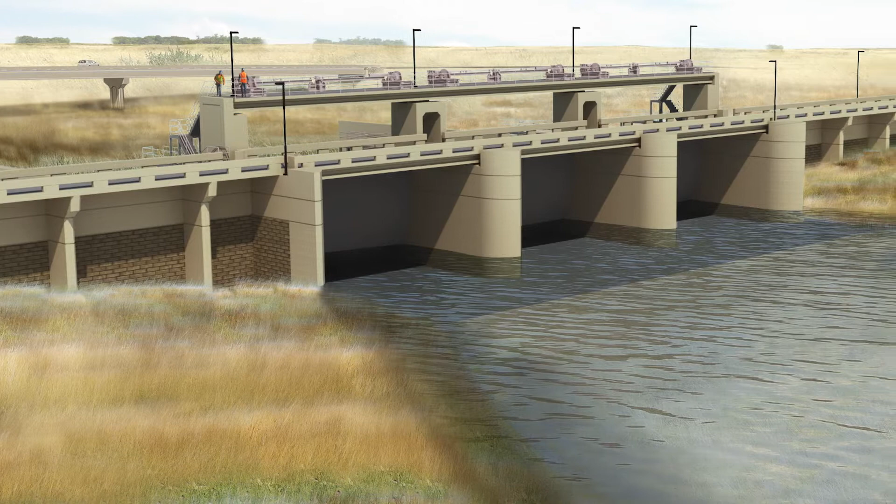Sure. So a lot of people tend to think that this dam we're building is going to be a Hoover Dam type of situation, but you can see obviously the embankment, it is not that obtrusive. No, there's only one Hoover Dam, and this is not it. This will be an amazing engineering project when it's all said and done, but Hoover Dam's another animal. So no, it won't stick grossly above the landscape.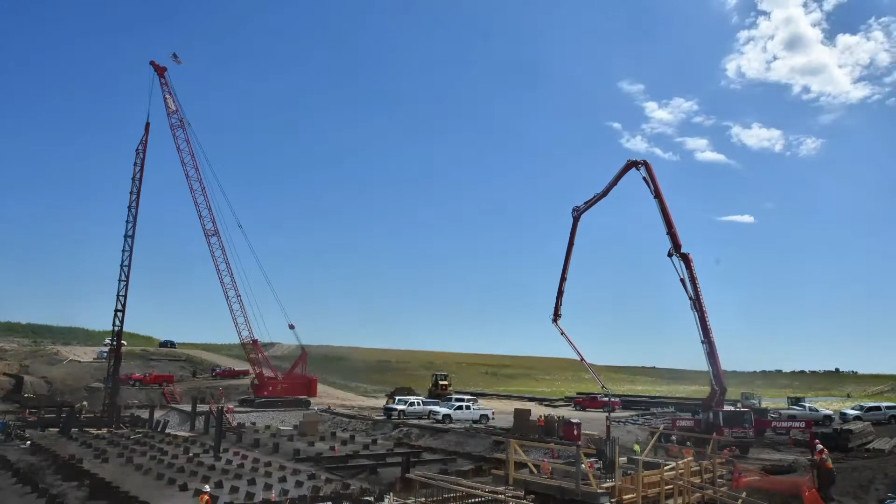Sure. So when we talk about the contract here, has the Corps been able to find cost savings as you've been constructing this project? Yep, one of the things that we found out early on was we were getting a lot more capacity with our pile in the soil. Basically, when you try to pull the pile out of the ground, we had a lot more capacity than what we anticipated. So we were able to go back and modify the contract to take out deep soil mixing. Deep soil mixing was basically where the contractor would solidify the ground so it wouldn't expand upward.

So obviously with the soil being 30 feet underground roughly, the soil's like a big sponge. When you take weight off, it actually wants to expand upward. So one thing that we learned was, boy, if we have a lot more capacity than we thought with the piles, we could hold it down. So we're taking the deep soil mixing out of the contract and going to save hopefully a couple million dollars. Wow. So that's excellent. And as far as just the normal construction, everything's on budget and moving forward and on schedule?

Everything I've seen so far is they're actually a little bit ahead of schedule in terms of where they should be at and what they've gotten built. So they've gotten a lot done this summer and this fall. And then what they plan to have before winter shutdown is pretty amazing in just a couple months. Sure. So we have the inlet control site, ongoing construction, the wild rice control structure under construction.

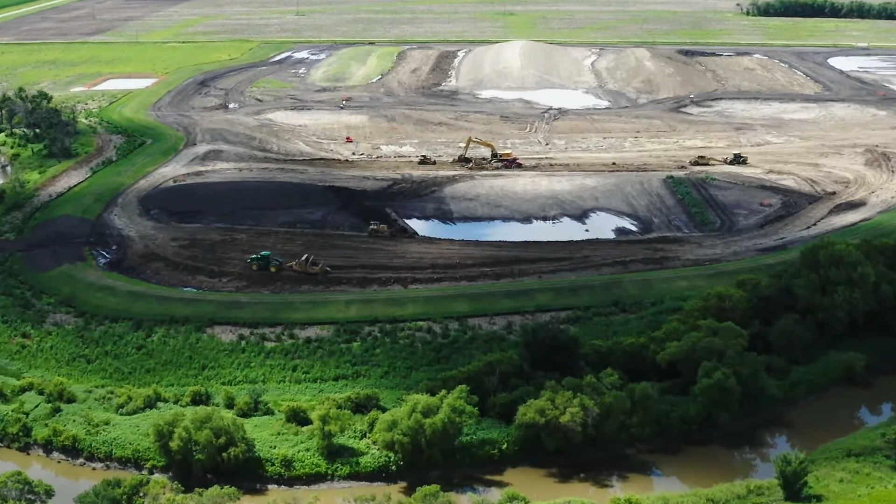What does the Corps have planned for next summer? So next summer, basically the wild rice infrastructure, starting to place the foundations for that, the walls, the control structure, starting to get that thing built and out of the ground. That's one of the big things at the wild rice infrastructure. At the inlet, it'll basically be starting to build the stilling basin, those downstream pieces, the walls, the piers, the abutments, starting to build the structure up.

Sure. And then at a certain point, maybe next summer, the following summer, you start to add the bridge components across. Okay. But meanwhile, the steel gates are being fabricated down in the southern parts of the U.S., Alabama, Mississippi, Georgia, and we'll start seeing them in a couple of years. Sure. And then we also have plans to start moving forward on the I-29 grade raise project, hopefully next summer. Yep, absolutely. And I think maybe that would also provide some level of excavation for the Red River control structure, and we're looking at that a few years down the line.

Yep. And that would really be the larger structure of the three that we're talking about here, right? Yep, so we always jokingly say the inlet is like a smaller cousin. The wild rice is the younger brother, and the Red's the big brother. Sure. So the Red River structure is gigantic compared to the other two structures. So hopefully that'll get awarded in spring of '22. Okay. And that's currently being designed right now, I understand. And there's a physical model as well in Vicksburg that's been providing excellent engineering results.

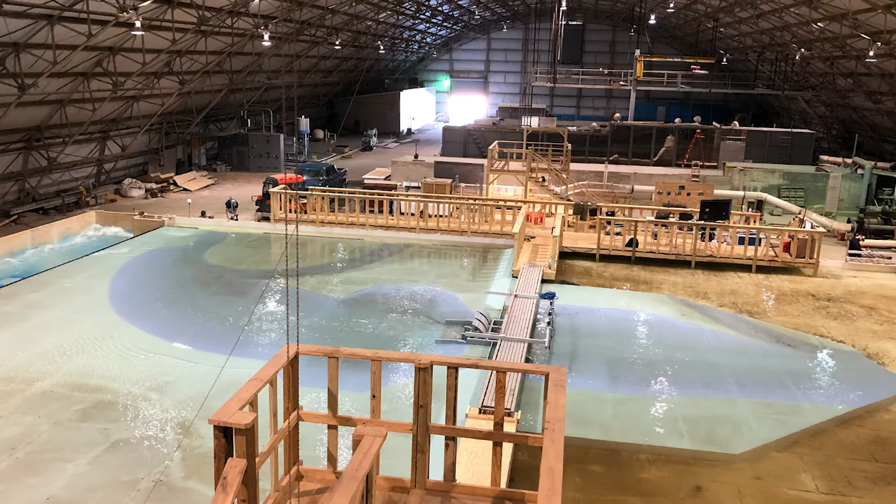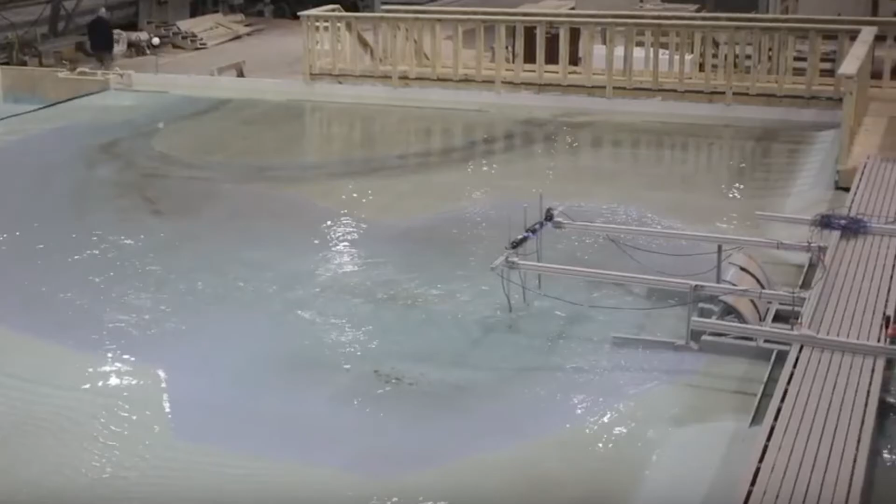Yep, you're absolutely right. So our Engineer Research and Development Center in Vicksburg, Mississippi has been building a scale model last fall and last winter, and we've been testing the water flow going through it to make sure the velocities are matching what our computer models say. So it's been pretty cool to see how the physical model and the computer model match up together. So that's been ongoing.

But yeah, like I said, we're currently ongoing with the design of the Red River structure. We're 65% of the way done through that thing, and we've got a nationwide team, people from Los Angeles to Memphis, Tennessee, all the way out to Philadelphia. People all across the country working on this project, bringing in their expertise for the betterment of the project. Yeah, I understand there's quite a few districts working on this at the moment, so that's very cool to see that occurring.

Yep, it's not just a St. Paul-led project or St. Paul-only project. We've got 10 districts across the country and 5 divisions. So there's 9 divisions in the Corps of Engineers. We've got 5 of them on this project. And I think there's 45 districts, if I remember right, and we've got 9 or 10 of them on this project. Excellent. So, bringing in the best people from across the country to help us out.

Yeah, it's such a unique project. I mean, it's one of a kind, and the split delivery of this project with our partnership with the Corps is absolutely outstanding. And I think we're all learning quite a few innovative and cost-saving approaches to contracting and building these terribly important pieces of infrastructure. So it's very cool to see the national collaboration that's occurring.

Yeah, absolutely. It was pretty cool last spring to go up to Winnipeg and see their project. You stand on the banks of the channel with the water flowing through it. It's almost like looking 15 years in the future and seeing what the Fargo-Moorhead project will look like. So it has saved their town and community multiple times over. So yeah, no doubt about it.

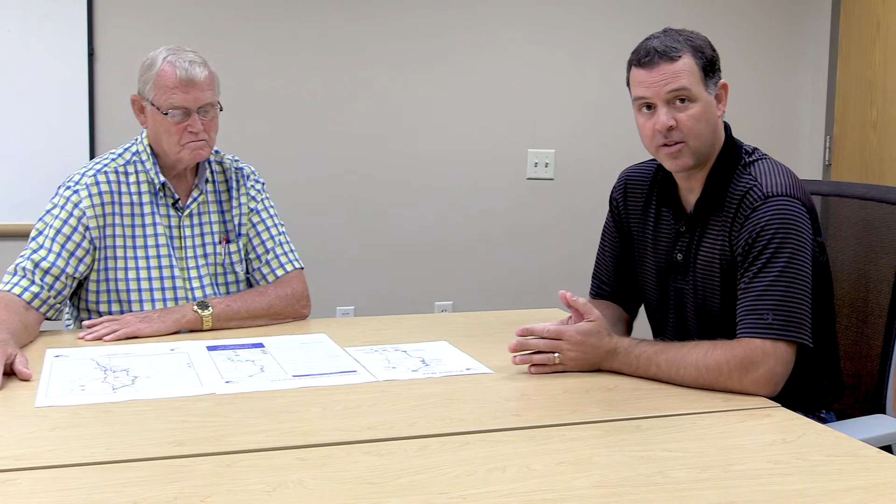Today I have with me Dan Jacobson, the chairman of the Cass County Joint Water Resource District. The Cass County Joint Water Resource District has been the acquiring entity for all the property necessary for the diversion channel and the southern embankment. So we have Dan here. We're going to ask him some questions about the status of the property acquisition and see how things are going.

So Dan, maybe you'd like to introduce yourself and just mention how long you've been on the Cass County Joint Board and how long you've been working on the diversion project. Okay, my name is Dan Jacobson. I'm on the Cass County Joint Water Resource District. Been on there for 10 years, and all 10 of those years have been associated with the diversion project.

And as far as the land process, we take it very seriously because it's a really important part of this project. It starts with a design that shows that the property is needed for the project. Next, the Diversion Authority approves us to start the process of purchasing it. So we start with initial contact of the property owner, and then sometimes we have to ask for rights of entry to survey the property to get the property lines down.

And then we determine the fair market value, and that's done with registered appraisers. And then our land agents go out and offer just compensation. And if there's a home involved, it's relocation and reestablishment benefits. And then hopefully we have a purchase agreement and negotiations through our land agents.

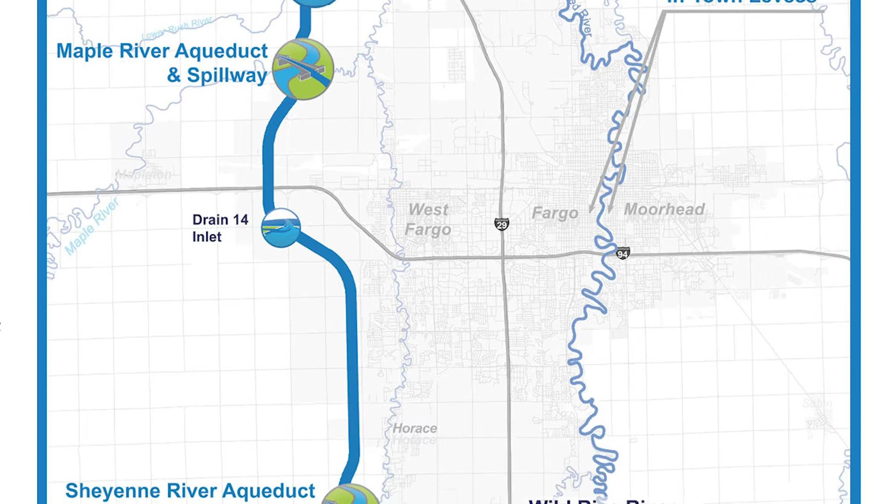Have you ever had any issues with the values that they come up with? Well, not really. I think they've done an excellent job. But that is their job, and they're professionals. We try and look at both sides of the issues. Our land agents do all the negotiation, and we just basically look at what they bring to us, and try not to get involved personally in the negotiations.

So how many parcels has the Cass County Joint Water Resource District acquired? 395 to date. Okay. So that on top of the City of Fargo's acquisitions, they're somewhere around 750 parcels total. It's been a huge sacrifice for some folks that have been impacted by the program to date.

And about how many properties do you imagine we have left to acquire for the diversion channel and the southern embankment? I think the last number I've seen is we're in negotiation on 155. 155. So we're getting close. Probably about a quarter of the properties left to still acquire at this point.

And so can you tell the legislators a little bit about what you like about the process, and where the landowners have the ability to work with you to try to find a resolution on the value of their property if there's a difference? Well, I think it's very, very fair. We do our appraisal. If they aren't satisfied with it, they can get their own appraisal. And if there's a difference, then is when the negotiation starts. But it gives them a chance to feel very confident that we're offering them a fair price.

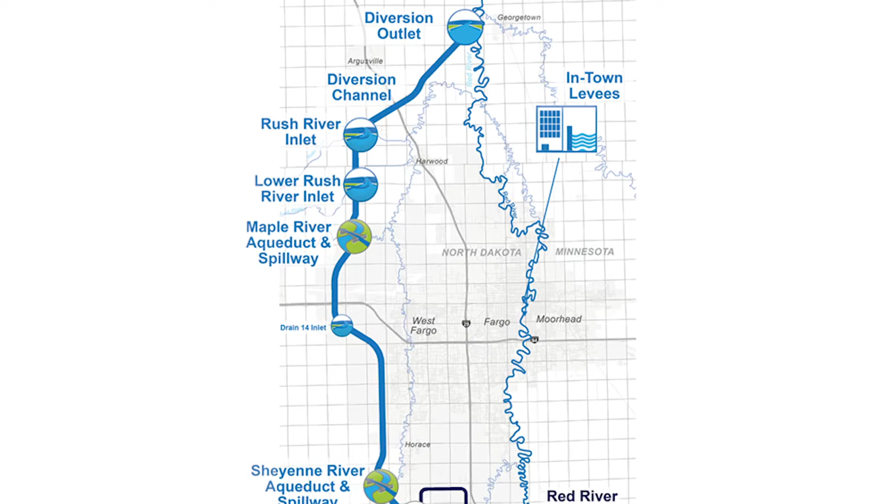And so from my standpoint as the diversion executive director, I've been asked to keep this project moving forward on schedule and on budget. And one of the constraints that we have is the procurement of the public-private partnership, the developer that's going to be building the channel component of the project. And as we move into 2021, we are fully anticipating getting bids and starting construction in 2021 on the channel.

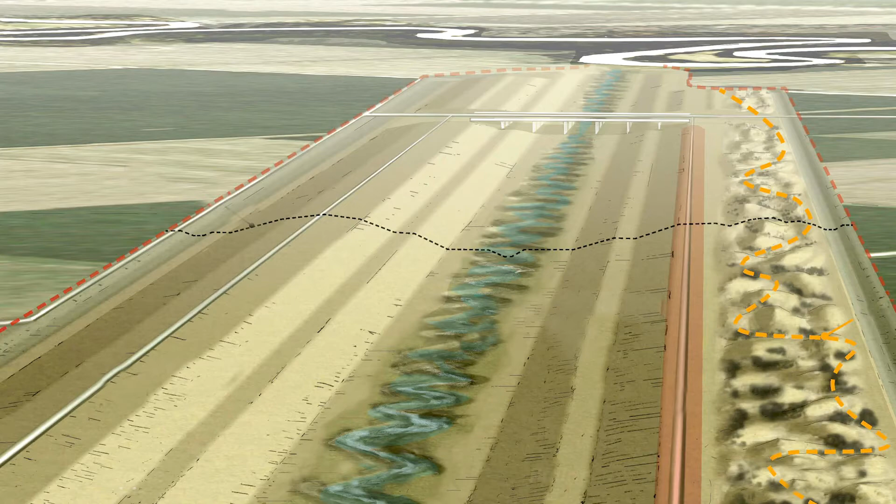So that obviously has put a lot of pressure on the Cass County Joint Board to process all of the parcels that are necessary for that channel, and has probably led to some of the more difficult conversations lately concerning property values. Yeah, we're under a time strain, so we're very cautious that we're offering them a fair value, and hopefully we can negotiate to where we're comfortable and they're comfortable. Sure, absolutely. And keeping in mind, of course, that what we're asking of people is very difficult. There's farmsteads in here operating, a lot of ag operations operating in the area that's impacted.

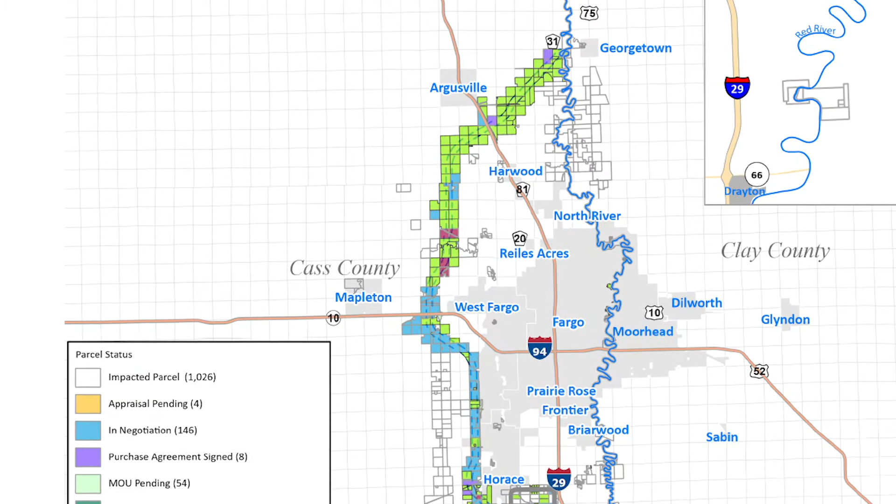So Dan, every month in our diversion board packet, we have this property acquisition status report. Can you just kind of show us what this is and talk about it for a second? Well, it's color-coded to these properties that are needed and what stage they're in. The green we've already acquired, and the blue is in negotiation. So there's different colors for different phases, and we meet every 2 weeks. So every 2 weeks we're hoping that this changes as we acquire more properties.

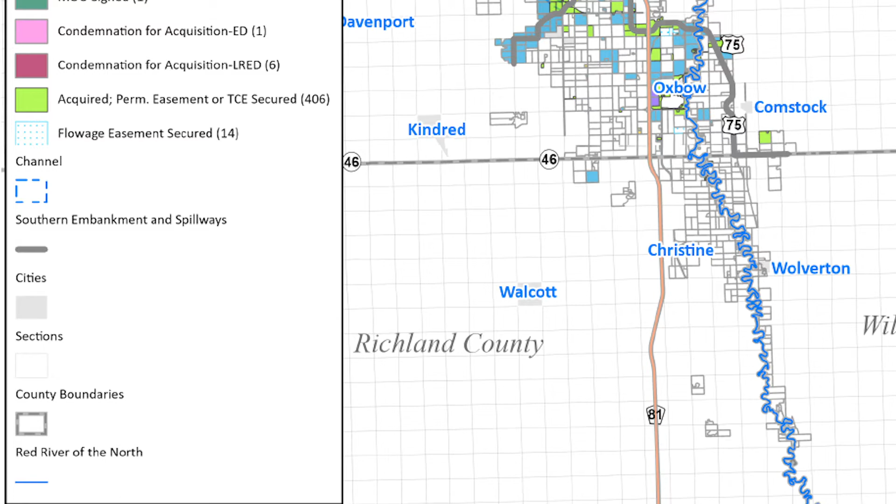But it's a good map for us to look at to see where we're at and where we have to be. And there's obviously a lot of boxes that are still white. So what are those? In the bottom, that's where we need flowage easements for the retention area, and those will just be easements and not outright purchases. Sure. For when the water has to be held there during the flood events. And I understand it probably isn't necessary to acquire those flowage easements until the project's constructed and ready to be operated. Is that correct? Yeah, I think as soon as we get the property purchase that we need for the construction of the project, we'll start going after the flowage easements.

Yeah. So we have a number of milestones coming up here, and one would be the acquisition of the property for the diversion channel, so we can hand that over once we get the P3 bids early this upcoming year. And then obviously continued property acquisitions for the Corps of Engineers work as well. And they're looking at the Red River control structure and the I-29 grade raise project. And the Drain 27 wetland project too. Yep, that is moving forward right now as well. We're just in the process of appraising that land, I believe.

Okay. And I think those three projects alone are going to be over a $200 million ask from the federal government this next year. And we have a lot of good indications that we'll be able to acquire those dollars. But of course, it's always an effort for us to go to Washington and advocate on behalf of the Corps of Engineers in order to acquire those federal funds. But just between the diversion inlet and control and the Wild Rice structure, we've already expended over 200 million of federal funds to date. So that continues to move forward very well. We're looking at about 8,000 acres for just the channel alone, so it's huge, and you can see why our land costs are so high.

And if we didn't need the land, would we offer the land back to the original property owner? That's usually the way the contract is; they have first right of refusal. Okay. And could they purchase it at the same price that we purchased it? We haven't gone to that, but that would sound like a fair way. Sure. Yeah.